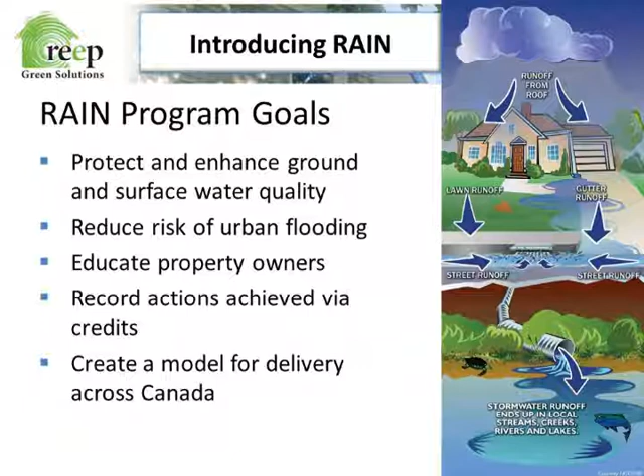Now, because Kitchener and Waterloo were the first stormwater utilities developed in Canada, and we have a first program where a municipality and a not-for-profit are working together to spread the messaging, we have created a very unique delivery model here that's now being considered for replication in other municipalities across Canada.

So a little bit of a backgrounder about what stormwater is and what the problem is. The way I like to start is to ask people to think about when they're going for a walk in a forest, because we take a lot of our cues from natural systems. Excuse me.

So in a natural system, such as a forest, if there's a light rainstorm going on, you're not getting a big torrential downpour on your head. You're getting little drips of water. The water is held by individual leaves. When it's heavy enough, the leaves sort of hang down and drip small quantities of water onto the ground.

And that water is slowly infiltrated into the ground, where it goes through leaf litter, it goes through soil, it goes through sand, and the pollutants are filtered out. And as well, the bacteria can eat some of those pollutants.

That water slowly filters down and recharges our groundwater for drinking, and it also slowly makes its way laterally to recharge our rivers. So if there is a really big rainstorm, you'll see a small increase in the level of water in the river, but you won't see a huge increase because everything is moving so slowly.

And also, if there hasn't been a rainstorm for a while, you'll still see that the water levels are quite consistently high in the rivers because of this regular recharging of the rivers from groundwater. So that's the way it works in nature.

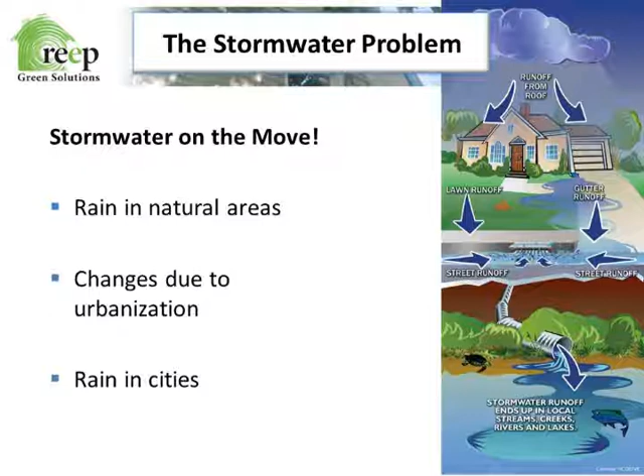You can see very high river levels. Sometimes you'll see flooding, roads washed out. And during times of drought, you'll see very low water levels because there's not a lot of groundwater recharge to keep the river levels regular and constant. Now, so those are the big changes.

And overall, the impacts of those changes fall into a few different categories. In this program, we talk a lot about water quantity, so how much, and water quality, how good is that water. So when you have a lot of hard surfaces and intense rains, you can end up with flooding of rivers, flooding of foundations, flooding of parking lots, and also in your rivers, when the water is moving quickly, you can get increased erosion, so you get that water that looks like hot chocolate. I'm sure you've all seen it.

In terms of water quality, you're seeing that discolored water as well moving on the roads, making its way into the storm sewer, into the river. So that carries with it bacteria, fertilizer, pesticide, drips from cars, etc.

So that polluted water is making its way into the rivers, so it can reduce the surface water quality as well as groundwater quality if that water is flowing into the ground. And if you get high levels of bacteria that are being pulled into beaches, then that can sometimes close beaches because they're unsafe for swimming.

Now, one of the big challenges with cities, particularly the areas that were built before 1990, is that we've got our pipes and our roadways and our river corridors all sized for weather patterns up till about 1990. But with the increase of climate change, you're going to see more frequent and intense storms.

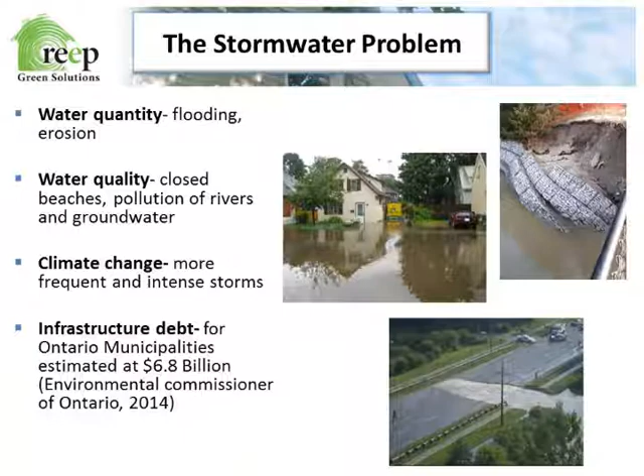Now, in Kitchener and Waterloo, we were the first municipalities in Canada to decide that it was important to take action to try to deal with this deficit, this debt problem. So what's been explained to me is that each property at the residential and non-residential level had been assigned taxes from the general tax base to help support a wide variety of things.

And so one of the pots of money that would be pulled out of that general pool of money would be for managing stormwater and fixing old infrastructure. But every year there had to be a renegotiation with all the other players that wanted that money as well. So it provided unstable and often too low a level of funding to maintain our stormwater infrastructure and to update where necessary.

So after many years of public consultation, I think it's about 4 years, in 2010 the City of Kitchener and the City of Waterloo approved a stormwater utility rate. That was a way that they would assign a fee for every property based on the amount of stormwater that it contributed to the storm sewer. So big properties contributed a lot of water and had to pay a bigger fee, and small properties contributed a smaller amount and had to pay a smaller fee.

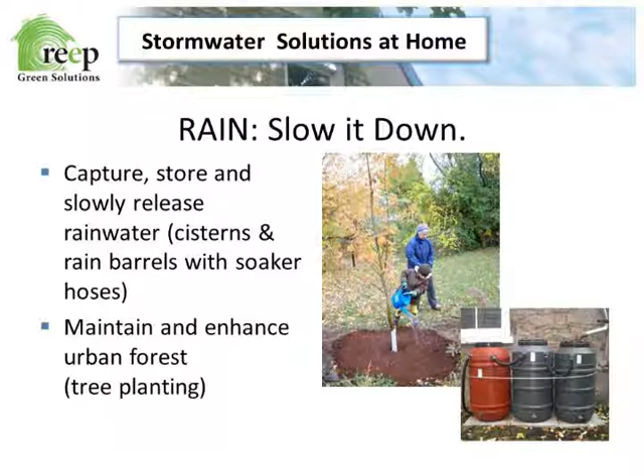Another really important thing that we need to think about is that we used to have a lot of forests in this area, and one of the best ways to try to restore some of the natural stormwater function in the city is to take care of existing trees and to plant new trees. The next thing we like to talk about is soak it up. So how can we soak up that rain? So if we've got downspouts, we can direct them, like I said, to a rain barrel and have that water slowly drip out and soak into the ground.

There's also permeable asphalt and permeable concrete, as well as a plastic grid type of system. The common thing is that all of them you can walk on or drive on, and they let the water through, and then underneath you have about 18 inches of washed stone that is essentially a reservoir for water to be held and to infiltrate.

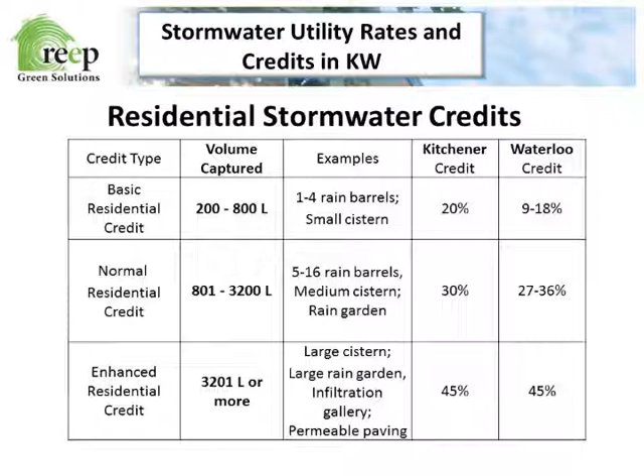If you have something like a rain garden, it will ask you what's the size of the roof that is catching this water, what's the size of your garden. And you'll punch that in, it will calculate the volume that you're getting from that, and it will tell you your credits. If you have, say, an infiltration gallery, which is a big box that you put under the ground to catch water, the city would likely have already notified you that you had one of those built with your house. So you can just use that information to get a full 45% credit with the fees. Or if you've got permeable paving, you can show the area, the size of the driveway and the construction, and then you'll get your 45% as well.

As with anything, the most important thing to do in preventing problems is to be ready. So try to make sure that these things don't happen. It's easier to prevent than to clean up, and a lot cheaper too. So there's some very simple tips. If you have eaves troughs at home, and almost everybody does, just make sure that the downspouts are extended 8 feet from your foundation where possible. You have to keep that water away from your foundation. Also direct those downspouts onto an absorbent area. So grass is fine, but you could also consider an infiltration gallery or a rain garden.

If you've got rain barrels, make sure that they're drained on a regular basis before rain so you're not getting overflow. And in the winter, make sure to disconnect them and drain them and reconnect your downspout and keep that, like I said, 8 feet from the foundation so the water's not coming back in.

In your eavestroughs, if they're plugged with debris, then they can't do their job, so make sure that they're unplugged each season. And if you have old eavestroughs, sometimes even though there's no debris in them, they still may have leaks, so the joints may be kind of coming apart. You can repair or replace them. With your foundation, you can look for cracks and repair those.

And a really inexpensive start to dealing with foundation issues is to get some soil and regrade around your home so the soil is sloping away and the water will move away. I've done that on my own house. It cost a couple hundred dollars, and that was all that we needed to do to keep the water from coming in.

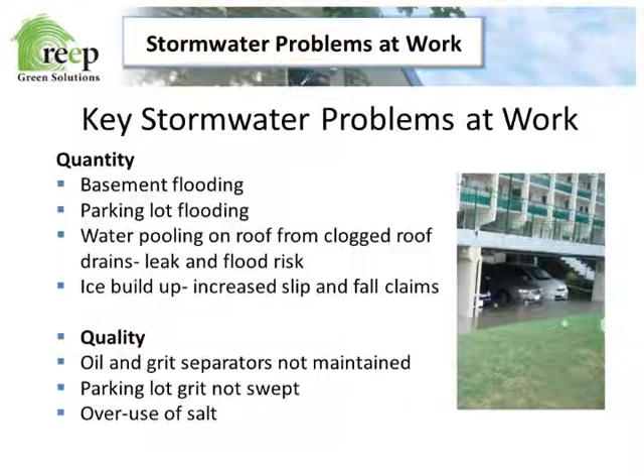Okay, so the cities have set up a slightly different credit system for businesses. You can still get up to 45% credit on your monthly stormwater fee, but it's set up with a few different categories. One is quantity, so you can get a 25% quantity credit. There's 15% you can get for quality, and 5% as well for educating people, because one of the most important things about this program is spreading the word. So if we can use the credits to help spread the word in the community, then that's something very important the credits will be achieving.

Unlike the residential credit, you need to apply once per year for the business credits. One of the reasons is because there are systems on business properties that the cities want to make sure that you're maintaining. And you see down below that there is quite a difference in the rates that are charged in Waterloo and Kitchener. Kitchener is at a full cost recovery rate, so all the money they take in supports all the work that they do.

And Waterloo, they're slowly working on increasing their rates to that full cost recovery. They're not there yet, and they have to work with their council in order to decide what higher rates might be necessary, but they're not at full cost yet.

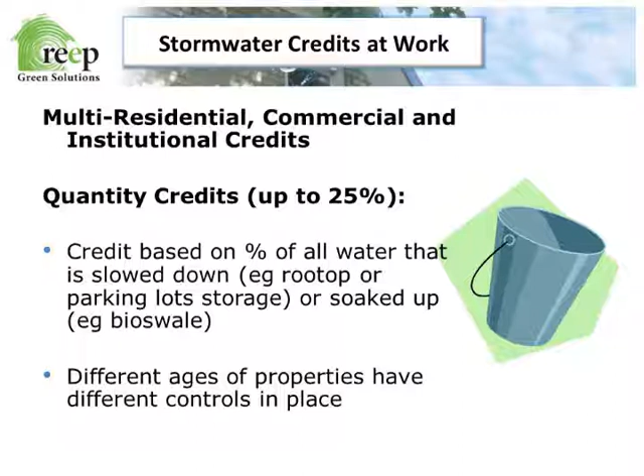Okay, so in terms of the credits, quantity is the highest amount of credit you can get. So that's basically how much water you're catching and slowing down. So you will get a full 25% credit if you catch all of the water on your rooftop and your parking lot. And different ages of properties have different controls in place because over time, planning requirements and building code has changed.

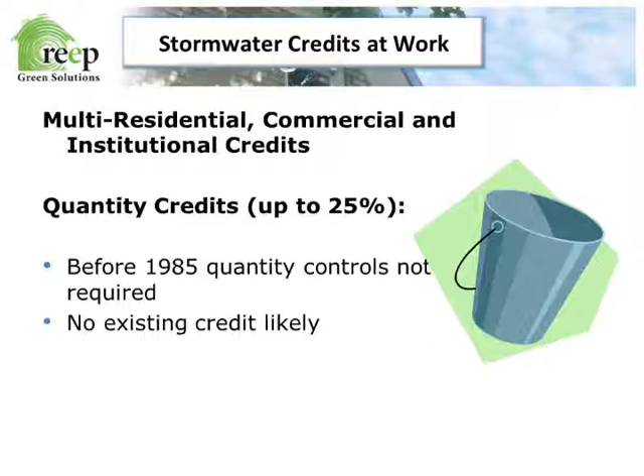Before 1985, there were no quantity controls that were required when you're building a property, so you're not likely going to get a credit for what you've already got on your property. You're going to have to work a bit harder.

After 1985, it's very common that people would have flat roofs with rooftop storage on them. So you just see this little, almost like a little grate, and then the drains on the roof have a little flow restrictor. So when it rains, the rooftops are designed to hold a little bit of water. They have a liner that goes up along the side, so it's almost like a little bathtub concept. You'll get a little bit of water standing on the roof for a while, and then it will slowly flow down into the storm sewer in the river.

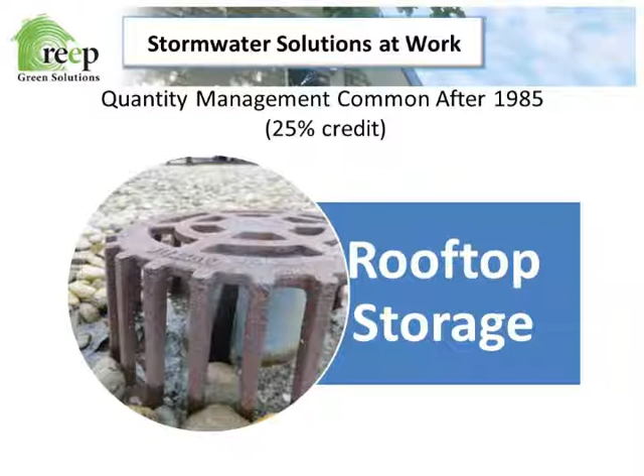And it's mimicking a natural system because it will slowly release that water, so you get more regular river levels. So anyone after 1985 will likely have rooftop controls and be able to get that credit.

After 1990, a lot more requirements came in. So quantity control ponds are common. They basically look like almost like a pond that just has grass in it. So it's the right shape. It's kind of a bowl shape, but it just has grasses. Sometimes they're mowed, sometimes they're not.

With parking lots, parking lot storage became common. So you can either have flow restrictors on your parking lot drains, which would mean that you get a little bit of standing water in your parking lot, and then it would slowly drain out. Or you can have large chambers under the parking lot that hold a lot of water and then slowly release that. Rooftop storage we already talked about.

Infiltration galleries take storm water from downspouts from roofs and are underneath the ground and hold water and store it temporarily until it infiltrates into the ground. So that's a common one you can get cash back for as well.

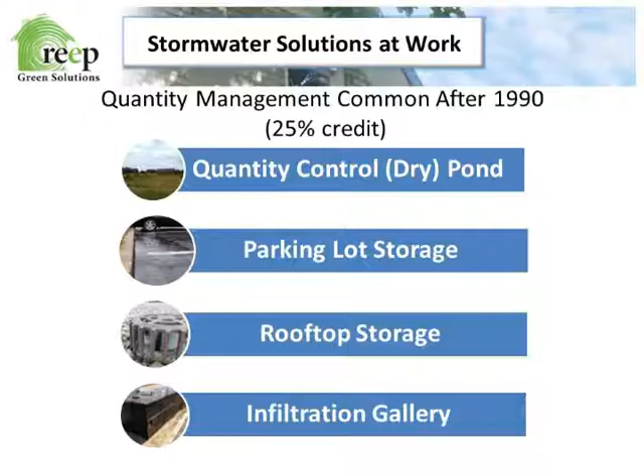Now, if you have an older property built before 1985 or you're thinking of a new build, these are some of the things that you can consider to get an increased amount of quantity credit. So you can put an infiltration gallery into your design or your retrofit. You can use rain gardens to soak up parking lot water or rooftop water. You can do rainwater harvesting.

So if your business is looking at saving money by reducing the amount of potable water you're using, you can talk to them at the Region of Waterloo to see if they can get a grant to you to help with some engineering consulting fees around that. And you'll also receive cash back for the volume of water you're actually saving for that year.

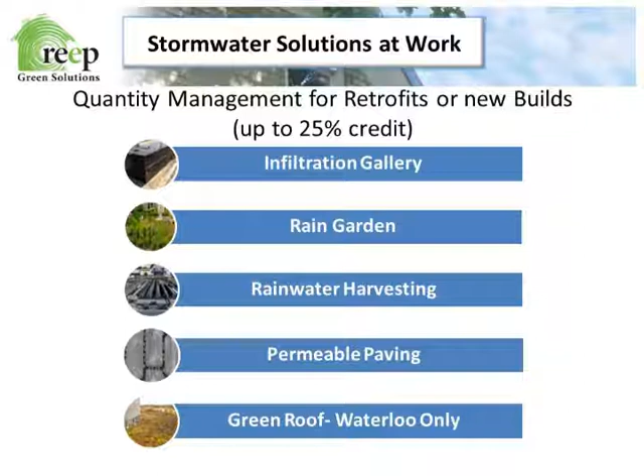Another option to consider is permeable paving, which we talked about. And green roofs are great to slow down water, soak it up, keep your buildings cool, etc. But at this point, Waterloo only gives a credit for that in terms of quantity. Okay, the next is quality.

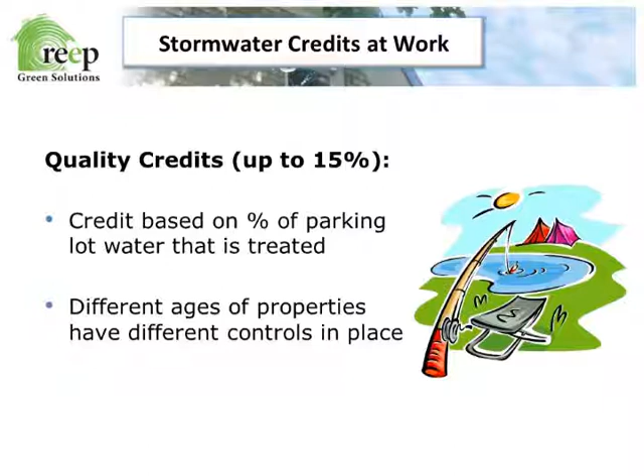So how clean is that water? For the purposes of the credit, it's only parking lot water that's considered dirty and a concern. So rooftop water is not part of this calculation. So if you, for example, manage all of your parking lot water for quality, then you'll get 15% credit. And as with the quantity credits, different ages of properties have different controls in place, according to what was required at the time of construction.

So before 1990, you're pretty much out of luck. There were no quality control measures that were required as part of the actual facility. But after 1990, you'll see things like stormwater quality ponds. So those are the wet ponds with standing water. You'll see vegetated swales and vegetated filter strips. They're essentially ditches with plants in them that hold water and soak the water in, and then the plants also help to clean the water.

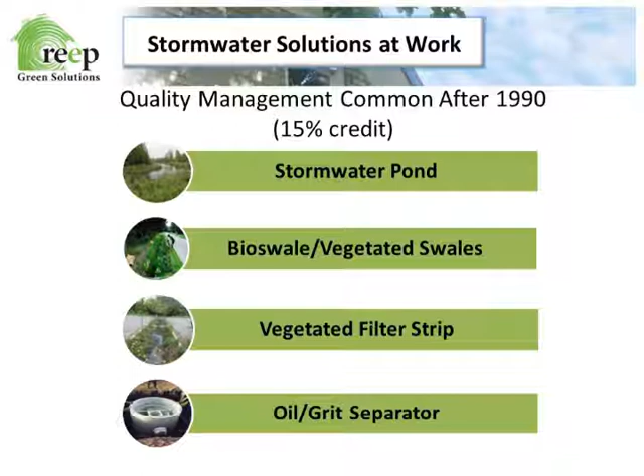In parking lots, you'll look inside the drains in the parking lot, and you'll see a little filter in the top, and that will tell you that there's an oil grit separator there. So you can use these types of things to get up to 15% credit on your stormwater bill. Now, for quality credits for buildings of all ages, you can do some maintenance-related things too. I was mentioning that grit from parking lots is a source of pollution.

So if you submit a paved area sweeping plan, which is basically an outline of how you sweep your parking lot, how often you do it, who does it, and how the resulting waste is disposed of, you can submit that to the city for a credit. Also, if you have a salt management plan for your site, if you hire a Smart About Salt contractor or your facilities manager is Smart About Salt certified, then you submit a plan that says, these are the main things we're doing to reduce salt use. This is what we've applied this year. Here's my signature. Send that in, and you'll get a credit of, for each of these, 5% for quality.

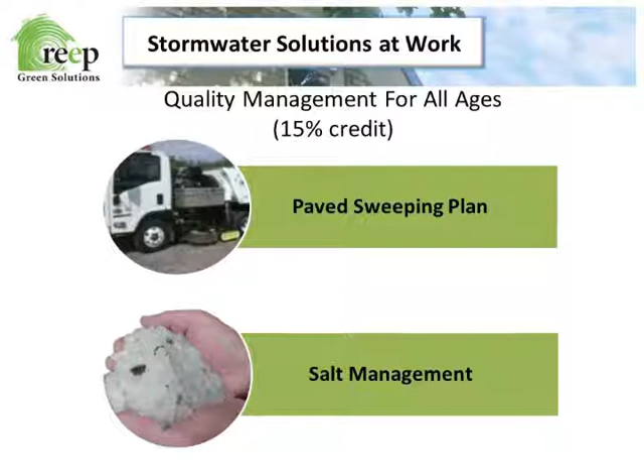The last credit is really very easy to get and really very important. I was mentioning before, one of the big purposes of having the utility and the credits in the first place is to make things better. So we need people who understand the challenges and are ready to do something about it and will share the word. So the education credit, the goal of that is to educate people. For non-school properties, you have managers, facility supervisors attending a workshop and then circulating the materials to their employees. And you do that once a year. The workshop needs to be about an hour.

For school properties, they ask that institutions have 4 hours of education per year, and that you circulate those posters and information to staff and students. There's a lot of different ways you can do that. A lot of supports on the city website. It's a nice, easy, and really important credit that people can get.

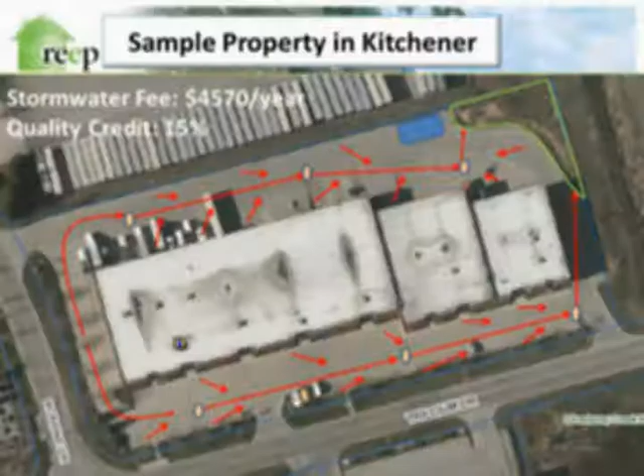So this is an example of a property in Kitchener that got some credits for work that they were doing. So this site was built around 2000, so a lot of these things that they have on the site were required as part of the site development process. So you can see in terms of quality, we're only looking at the parking lot because that's the only water that's considered dirty. So you can see the red lines are the dirty water. They're going into the little pink circles, which are essentially the drains in the parking lot. They're all being conveyed to the top right, which is a pond.

So this pond is gathering this water for quality. So all of that dirty water is settling in that pond. The dirty material settles out, and the clean material carries over into a storm drain that makes its way to the river. So because they've managed 100% of the water of their parking lot, they get a full 15% credit for that.

In terms of quantity, you're required to manage all of the water from your rooftop and your parking lot to get the full credit. So that's what they've done. The pond that they have that's managing stormwater from their parking lot is also a quantity pond. So it not only settles materials, it also holds enough water when there's a storm to protect the river. So that gets the full credit. And the rooftop water, the roofs have flow restrictors on them, and then that water flows into what's represented by a blue box, and that's an infiltration gallery.

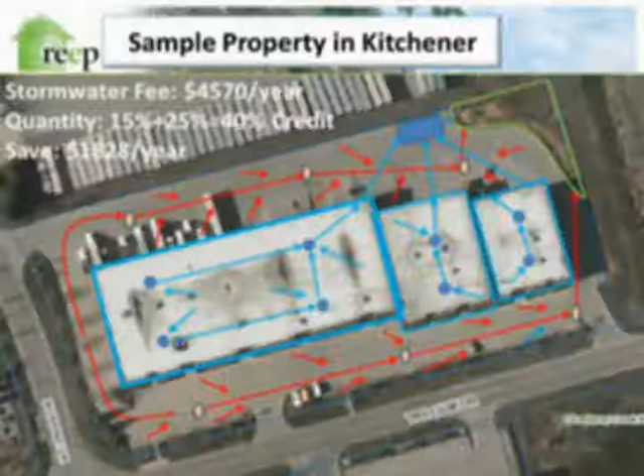So that's a big box under the ground that's soaking up water. Any overflow just makes its way to the pond. So altogether, they get the full quality and the full quantity credit. They save $1,828 per year at current rates, and the reason they are not getting their last 5% credit is because they haven't done an education seminar. So that's just the simple thing they need to do, and then they'll be at the 45% credit for the year.

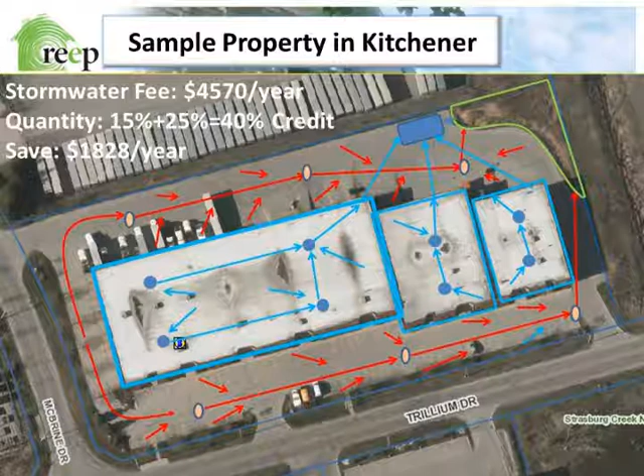Okay, so some of these concepts are sort of broad and general, and sometimes it's good to have some concrete examples of what people are talking about. Now, keep in mind that every site is unique and every solution is unique. So on your site, you're going to have your own challenges and your own styles and your own interest and budget, so you're going to have a unique solution. But I just wanted to show some examples of what others have done to potentially inspire you.

So that manages quantity. It's gathering the water from the parking lot, but it's also cleaning that water by filtering it through the soil, and also the plants are filtering that soil too with their roots and with the bacteria in the soil. So that type of solution qualifies for quantity and quality credit.

A lot of organizations are very interested in rainwater harvesting, like I said, because it qualifies for stormwater credits as well as a regional credit if applicable, and you save money on potable water. So there are below ground options. You can have very large systems, or you can have above ground systems that are very small. And because that's only managing quantity, that qualifies for a quantity control credit.

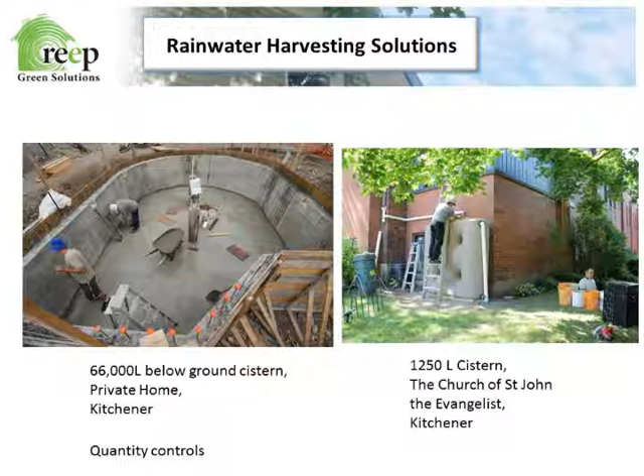A really interesting example that's local is from Kitchener Waterloo Collegiate and Vocational School. They took some permeable paving that I was talking about, so the water will flow through it, but they wanted to gather water underneath it. So they used infiltration gallery boxes and stone underneath to create a nice stable system underneath the permeable paving, but they also lined it with a pond liner.

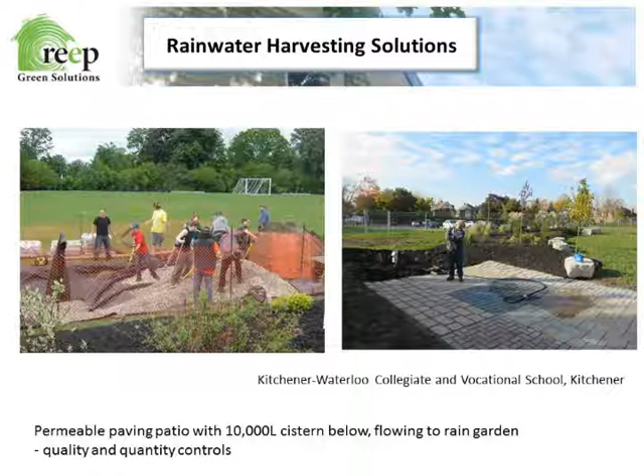So the water in this case is flowing from a ditch that is at the side of a football field. It used to just flow down the ditch and into a storm sewer and into the river, but now it flows down that ditch and into this permeable paving, essentially a catchment area. And at the end of the permeable paving, there's an opening with a pump in it, and they're able to pump the 10,000 liters out of that system to irrigate the trees and the shrubs that the students maintain on a regular basis. So that has quality and quantity controls, because at the overflow to that system is a rain garden.

So some storm-ready tips at work. Prevention, of course, is a lot cheaper than dealing with problems. So for eavestroughs, foundations, and trees, that's going to be pretty much the same tips as at home. With parking lots, you want to keep your storm drains cleaned out so you're not getting flooding. You're going to want to get in touch with the folks at the Smart About Salt program. They're a not-for-profit charity, quite reasonably priced, and really want to help a lot. If you've got oil and grit separators in your parking lot, you can get them inspected once a year and cleaned out as required, and that will also get you a credit.

Parking lot sweeping is another thing you can do to maintain quality. With your roof, you have to keep a good eye on those membranes in your flat roof. Are they cracking? Are they splitting? Is there a risk that they're going to be causing flooding? Keep them in good repair, and also with your drains, make sure that they're free of debris so they're not going to back up on you.

Now, there are a lot of opportunities to learn. One of the first things you can do is drop by REEP House for Sustainable Living. It's at 20 Mill Street in Kitchener. We're open on Saturdays from noon to 4. We have a certified energy advisor on staff who can answer any of your questions about energy, water, or stormwater.